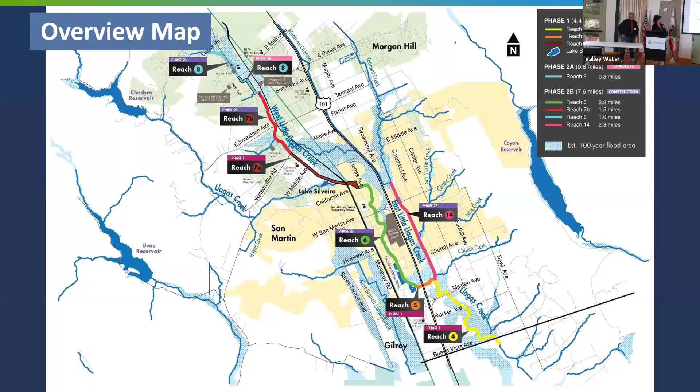This is the overall project, the Upper Llagas Creek Flood Protection Project. It is 13.9 miles long. As Mr. Ferrante said, it is our largest flood protection project geographically. We start in unincorporated Gilroy, south of Buena Vista, about 1,000 feet south of Buena Vista, all the way up through San Martin, both sides of Interstate 101, East Little Llagas on one side, Reach 6 on the other side. That takes us all the way up to Reach 7A, 7B, and 8.

Was there anything? Oh, it does work. I can't get it to work. Always the technical difficulties still. Yeah, I couldn't get it to work, but you guys can all see the reaches, I'm sure.

This project was Phase 1, which started September 3rd, 2019, and was completed in May 2020. Phase 2A, which is still currently under construction—that's the tunnel underneath Nob Hill—is almost completed.

So this is the long history of flooding. And I do have to say, having lived in Santa Clara County and working in flood protection, Morgan Hill is pervasively flooded. Year after year, even on small rain events, we see localized flooding. It's a serious problem, and I'm so pleased that we're able to address some of this with this project.

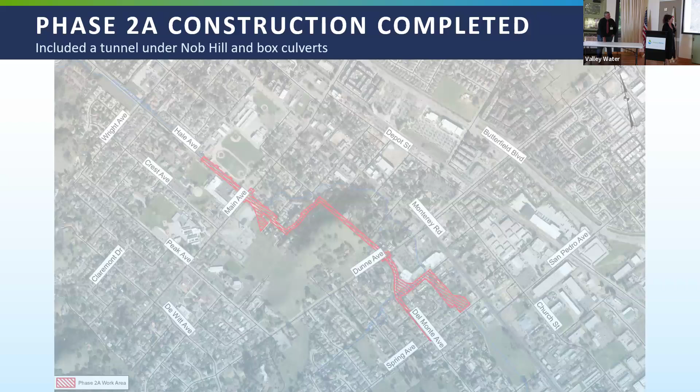Phase 2A, as I mentioned, is still under construction, but we're almost finished. Some of you might know that by the intersection of Hale and Main being open for traffic once again, so we're very pleased about that. A tunnel has been constructed underneath, right here in the middle, as well as twin box culverts, both upstream and downstream of the tunnel to connect to the creek. I'll show you some photos of that - that's the tunnel on the left and construction of the box culvert here.

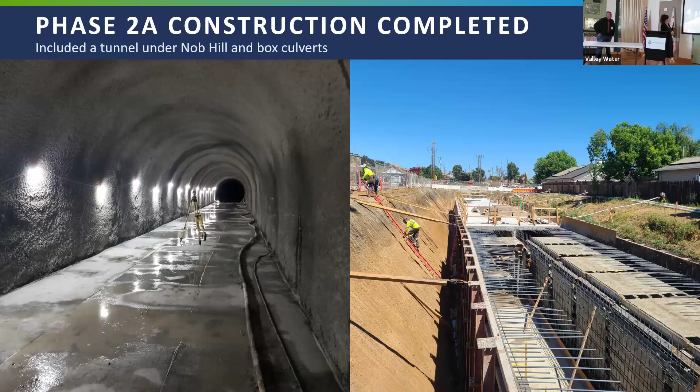And that leads us to phase 2B, and Mr. Ferrante will take over about the next phase of construction.

Thank you, Melissa. I just want to define what a reach is, since we keep using that word. It's basically from one street to another street, and phases are a bunch of reaches. There's been 3 phases with multiple reaches in each. Phase 1, as Melissa said, included reach 4, reach 5, and reach 7A. Phase 2 was just a portion of reach 8, which is the tunnel and box culvert construction you just saw.

So that leads us to phase 2B, the last phase. This includes reach 6, reach 7, reach 8, and reach 14. Starting with reach 6, that's the one in green, by the airport. Reach 14 is on the east side of the airport.

And then reach 7, we call 7B. 7A was the new channel between Watsonville, south of Lake Silveira. I just gotta answer this question right now, because when it rained last year, January of 2023, I must have had 20 emails asking how come the check dam is not removed upstream of Watsonville Road. You guys construct this channel and you don't let water go to it downstream of Watsonville Road, right? The reason for that is the area in red. If we open that up, we can cause flooding to those folks there, because that channel hasn't been improved yet.

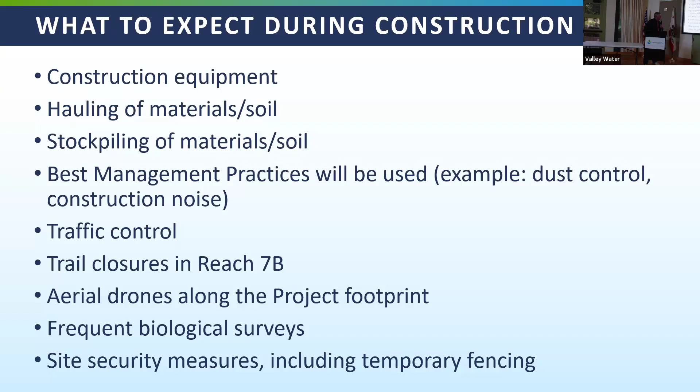The construction schedule is about 2.5 years, from this month until March of 2027. Then we have a 3-year plant establishment. We have tens of thousands of plants, probably somewhere in the neighborhood of 50 to 60,000, that will be planted, and that 3-year plant establishment follows after construction.

Working hours are 7 a.m. to 8 p.m., Saturdays 9 a.m. to 6 p.m., and no work on Sundays unless special cases or emergencies, which need prior approval.

So for those that live along the creek, obviously if you think something's wrong and there's an emergency situation, please call 911. If you just have questions about the project, Jose Villarreal is right here - that's his email and phone number, you can call him.

Then I have Granite Rock, who's the contractor for this phase, and they were also the contractor for phase 1. They're very familiar with the project, which is good for everybody. There's Granite Rock's phone number if you have questions about construction activity, but we encourage you to talk to Valley Water first.

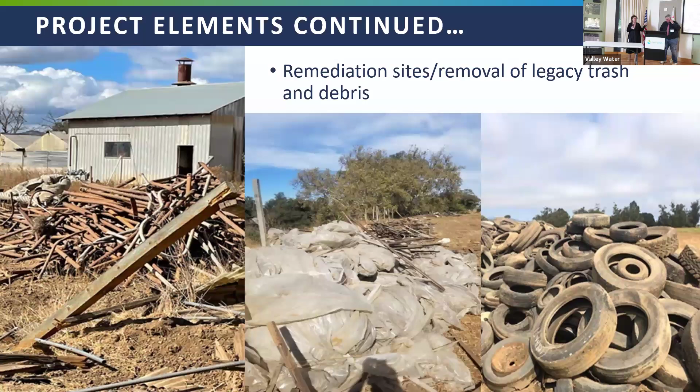One of the objectives of this project was to improve the overall ecology of Llagas watershed. Llagas watershed is heavily impacted by invasive species, as Mr. Ferrante showed you, the arundo, the blackberry. One of the benefits of controlling the invasive species and planting native species is getting a self-sustaining riparian corridor, so that your children's children, all of our families into the future, can have a vegetated riparian corridor that is readily available for fish and wildlife to use.

So what we do when we plan for replanting or vegetation is look at the ecology of the area - how can we improve it as Valley Water. In this case, it meant first removal of invasives and second follow-up planting with many trees and shrubs. As Mr. Ferrante said, phase 2 is 55 acres of planting and about 50,000 plants, and in phase 1, we planted 54 acres of vegetation with about 42,000 plants. The plants selected are specifically chosen for this watershed - the seeds are collected within the watershed itself so we know they are native in origin, then grown locally at a nursery and brought to us when they're large enough to be put into the ground.

That's a significant number of plants there. We have a question here from one of the residents joining us via Zoom. The question is, I didn't hear anything about Reach 8. When is that slated to start?

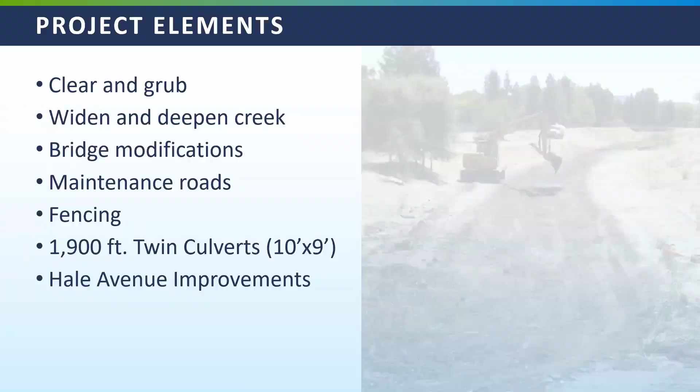No, the LOMR process will take place immediately following construction. One of the requirements is to submit the as-built to FEMA. We did try to expedite that future process - we did a CLOMR for this project that was approved by FEMA, and that CLOMR means conditional letter of map revision. So basically we said, here's what we're doing in the future, approve it. When we submit the final as-built on the project, we're hoping they could just check a box and say, oh yeah, we've already done a conditional review, this is the way the maps are gonna change. We hope that process will help expedite things, but that process typically takes at least a year, unfortunately.

So if we're talking about this project being completed in 2027, you're looking at maybe mid-2028 before FEMA would consider this. When the maps are revised based on the project improvements, letters will be sent out to insurance policy holders for flood protection, giving you the option of whether you pay for flood insurance or not. It'll be up to you, but you don't have that option right now.

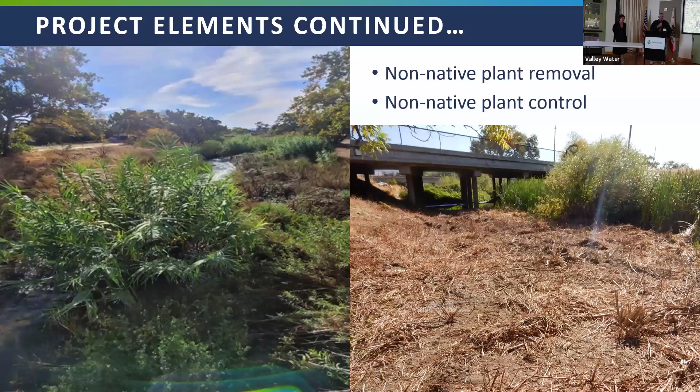On any of the stream banks, are you going to be using hardscapes such as gabions or rock fill, or is it all just native material? There's no gabions, but at the bridges we are underpinning and putting some concrete under the foundation for Llagas Avenue. We're putting some rock in the abutments of bridges. At San Martin Avenue, we're actually putting a low flow fish channel, concrete fish channel, and rock at that location. That rock protects the abutments, avoiding water getting behind the abutment and causing structural failure. So at the bridges mainly, there are some in-channel grade control structures, so the channel flows steadily.

We want it to flow steadily, so there are some grouted features, kind of V-shaped, maybe 10 feet in width, extending the width of the channel. Those are put in and grouted — there's some grouted rock in there. But that's a grade control structure feature. No gabions are proposed for this phase.

I do want to point out one thing about the size of the channel. Valley Water did what we call a geomorphic design, meaning we designed the size of the stream channel so we didn't get excessive erosion or deposition. That keeps the channel open with free capacity for flood protection, but also keeps sediment moving through the stream. It doesn't create issues for macroinvertebrates or the basic food base for the stream itself. These ecological principles were brought in through the various phases of design, so we get a stream channel that functions like a stream channel, not just a flood protection channel. We're not looking for a concrete-lined straight channel — we're looking for a functioning channel. There was a lot of work done on this project, and I think it's a really good test case for how you can balance flood protection and environmental needs.

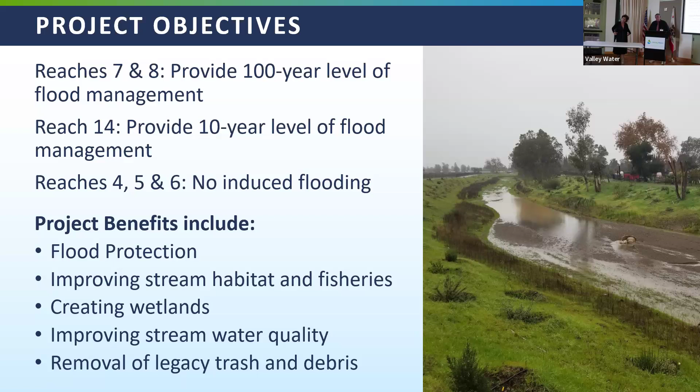This is somewhat peripheral to your construction, but I use all of the West Llagas Creek Trail, and I report illegal dumping and graffiti. There are sections of the existing trails, for example from East Court north, that don't show up on your map of waterways that the district is responsible for in your customer request system, which is a bit frustrating. So as you open up these new segments of trails, please make sure the system understands they are your responsibility so we can help you maintain them. Thank you.

Well, I'm not sure which database that's referring to — Access Valley Water is probably my guess. So we need to make sure we update that to include the new reaches as they're completed. The trails are a function of the city — the city has a joint use trail agreement with Valley Water. So there's certain things Valley Water is responsible for, like the channel and its maintenance, whereas the city's responsible for the trail and trail amenities. I'll only bother you for the ones I know you're responsible for. Okay, very good.

We have another question from Zoom: Will Hale Avenue continue to widen north for Wright Avenue with the underground tunnel, or will the culvert be augmented as is? So, the Hale Avenue tunnel is done. The tunnel was underneath Knob Hill, basically from Main Avenue, just south of Main.

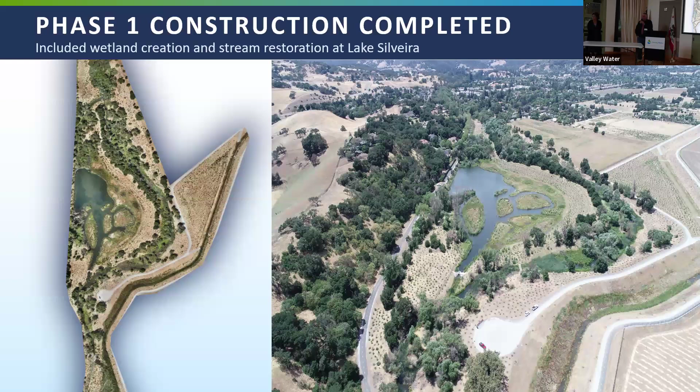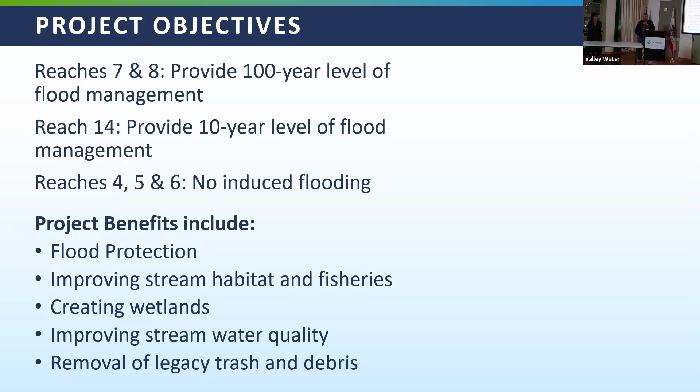I have a couple questions. One would be, you mentioned in passing that there may be a bridge over Monterey near Lake Silveira—is that water district or city? That's going to be city, that was a city slide. I know the city is looking into it—Chris Ghione can probably answer better than me, but the city's looking into providing that pedestrian bridge at that location to link the south trail of Lake Silveira. The other question would relate to the crossing at San Martin Avenue, that bridge there.

And will there eventually be something over 101?

To continue the trails, just curious about some trail questions, and we're gonna ask our expert.

All I can say is right now, for any trails south of Monterey Road, trails were not part of our project south of that. So the city or county, in this case the county south of Monterey Road, would have to go through the EIR process. Valley Water does own a lot of the property in fee, but we have some places where we have easement, and our easement doesn't cover that.

I'll just add that the city of Morgan Hill wouldn't do anything south of the confluence of Llagas Creek. That would be the County of Santa Clara. In the old days, county parks had a plan to run a trail adjacent to it, but I don't think it's in any of their current plan.

Thank you. That voice was Chris Ghione from the city of Morgan Hill, for those of you listening at home. Did you have another question?

So basically, when you mentioned the bridge over Monterey, that's the hope, and that's it? No, I think it's a little more than a hope, but I'll let Chris expand on that since it's a city project.

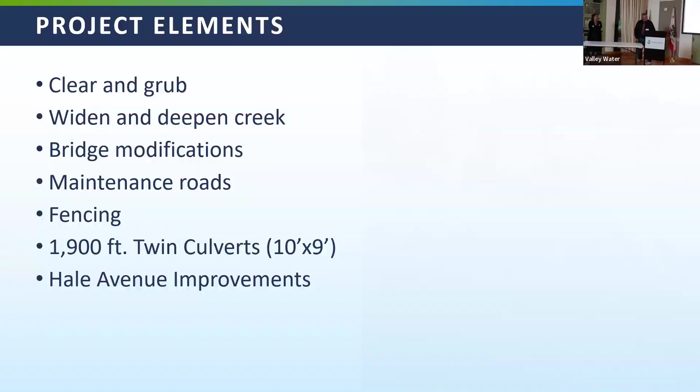The bridge would be adjacent, it would be a pedestrian bridge, adjacent to the vehicle bridge. The purpose is so that when the trail dead ends at Monterey Road right now, you'd be able to go across the creek and access the trail that's on the south side of Silveira Lake. That would be the purpose of the bridge.

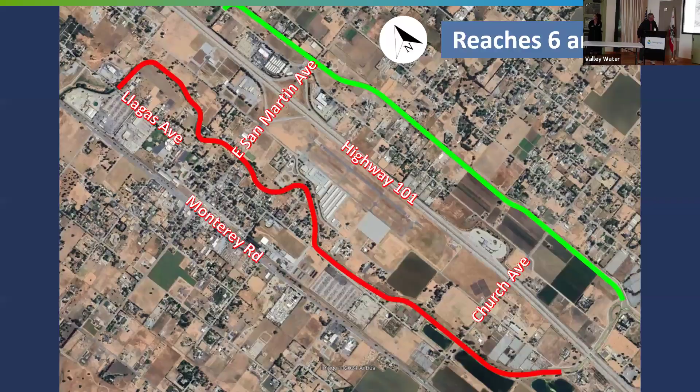We are working on a project right now to finish the planning for several trails around there. We'd be looking to get environmental clearance probably later this year or early next year, and then we'd be applying for grant funds to try and build it.

So it's basically over the creek, not over Monterey. Correct, okay, I got that. My second question—let me just interrupt real quick, so it'd be right there at the bottom, very bottom. It's over the creek, across there. Right, like most bridges—get to the other side.

The second question is, you mentioned hopefully in October of 2025 to remove the dam at Watsonville Road. Right?

That dam—is it, because just upstream there's the creek, the original creek is there—is that dam gonna be kind of a weir to allow only so much water to go into the existing creek that once was there and then flow over?

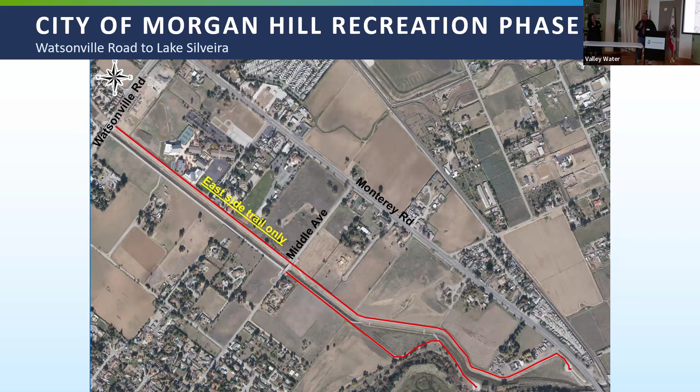No. So the pedestrian bridge that's right now on the east bank, probably 200 yards north of Watsonville Road, that goes away. That actually gets relocated to Edmundson Creek. There'll be another crossing right there at the confluence with West Little Llagas—a new creek crossing, a trail crossing. There's one further down on Edmundson Creek, but this will be one closer for that neighborhood.

So that part of the original East Little Llagas, that's basically where it starts? Yeah, that'll just be for local drainage, because we're actually deepening Llagas Creek there, so the other creek's invert is higher than the new invert, I think by about 5 feet. Gotcha, so it would take a lot of work. So it's best to just fill that in—it's gonna be a continuous trail.

Thank you for that. Any other questions in the room? Or any online, Jose? Give you a microphone so you can answer. Jose.

Question here: why is the final phase of the Upper Llagas Creek project so important? Would we still get flood protection without it? Unfortunately, no, you need this last phase to have the flooding protection. Without this last phase, we've just spent a lot of money and time widening and deepening channels and providing the rest.